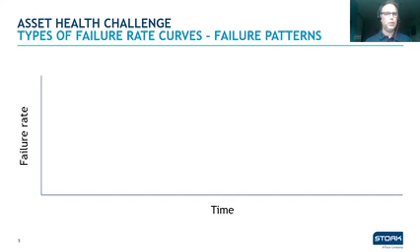First, we can have what we call infant mortality. The failure happens especially at the start of an operation, after the equipment was installed or commissioned, or after a repair.

The other one, quite opposite, is that you have a relatively low amount of failures, and by the lifetime of the equipment you see some kind of wear out, and at the end of the wear out zone, at the end of the lifetime, you have more probability of failure.

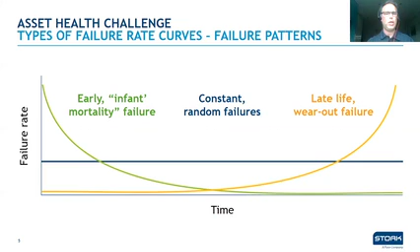The third option is random failures. Failures that happen over the lifetime of the equipment. They happen, sometimes we don't know why. It could be that we operate outside of the operating window, that the quality of the raw material has changed, that we have process inputs that have changed, or that we have maybe changing weather conditions. The failures happen, and in some cases we just don't know why.

Before I continue with my presentation, I would like to invite the audience today to participate in a poll. Please get ready to select one option out of the six on the screen. What do you think? What is the most dominant failure pattern?

Is it A, wear out, meaning slowly increasing probability of failure, and at the end of the lifetime you see more probability of failure in the wear out zone? Is it B, infant mortality in the beginning, slowly increasing probability of failure, and again at the end of the lifetime in the wear out zone, increasing probability of failure? Or is it C, fatigue, slowly increasing probability of failure towards the end, but we cannot notice one clear wear out zone at the end? Or is it option D, infant mortality, high probability of failure, and then constantly a probability of failure towards the end of the life?

Or do you think it's pattern E? Once the equipment is newly installed or has been repaired in the workshop, you see less probability of failure, less failures appearing. But then in the initial break-in period, you see a slowly progressing pattern of failures. Or is it

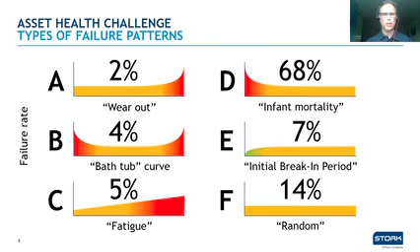The other conclusion is that only 11% of failures are age-related, and 89% of failures are non-age related. So the vast majority of failure patterns could be subject to condition-based maintenance. One of the key characteristics of condition-based maintenance is that it improves the accuracy of the probability of failure. In short, condition-based maintenance helps you better predict when a maintenance intervention is needed. It reduces unplanned downtime of your plant, and also reduces unnecessary tasks that you'd otherwise do with just time-based preventive maintenance.

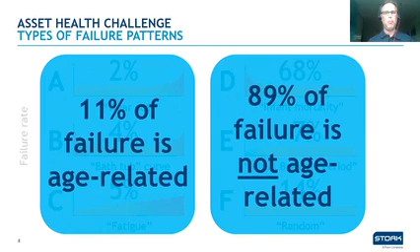In this period of the COVID-19 pandemic, better scheduling of maintenance interventions might also lead to fewer people on site, which is an additional benefit of condition-based maintenance. What are the three flavors? Within condition-based maintenance, we see predominantly periodic inspection, continuous condition monitoring, and predictive maintenance, or as we call it, APM 4.0, with reference to the Industry 4.0 era we are currently in.

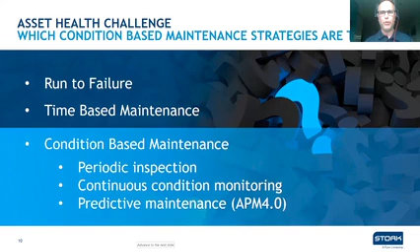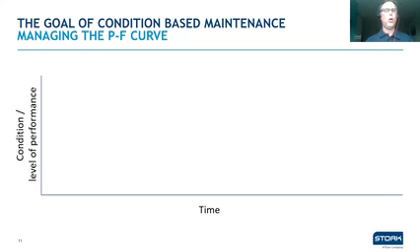Before I go into more detail about these different techniques, I want to take a closer look at potential failures. A potential failure is a condition that we can identify, which indicates that a functional failure is either about to occur or is in the process of occurring. For a long time, we defined a failure this way: the equipment breaks and we fix it. This was for a long time the most dominant maintenance strategy.

The graph on this slide, with the vertical axis showing condition and the horizontal axis showing time, shows the condition of an asset and how it degrades over time. We call this graph the PF curve. The time from the potential failure point P, where the equipment starts degrading, to the point where it actually fails, is what we call the PF interval. It's also called the warning period, or the lead time to a failure.

This is what we call today's current definition of a failure. In the red zone, as you can see on the screen, the degradation can really be noticed, and in that period of time, the equipment is no longer performing its function as intended. The main objective is to capture a potential failure before it actually occurs, before point F. So the key challenge is: how can we move left on the PF curve and have more lead time to properly schedule a maintenance intervention before point F, or maybe even before point P.

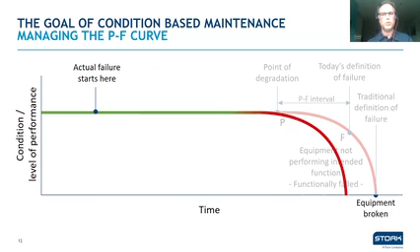Now, if we detect it over here, we are pretty late in the ball game. There is a very short lead time to schedule a maintenance intervention? To give us more comfort, we need to find ways to create extra lead time, based on certain criteria. It's very complex equipment, it's highly critical, and we need more time to plan properly a maintenance intervention, or order spare parts which are very capital intensive. We need a longer lead time.

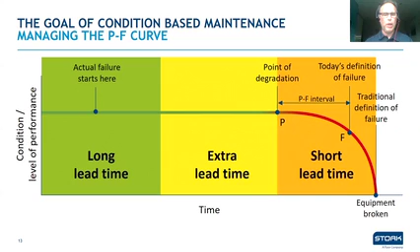Now, as I promised, let's take a look at the different techniques. We have periodic inspections as the first one. Here we enter quite late in the interval. The main characteristic is that it's usually executed by people on site who walk down the plant and do a visual inspection, use their human senses, use an infrared camera to do an inspection, take an oil sample to do an oil analysis.

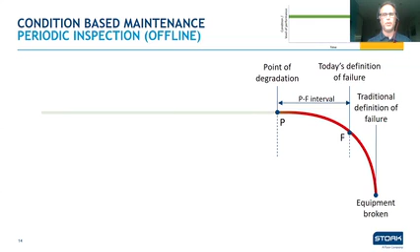Key elements of this, of course, is that we try to have an inspection interval which is shorter than the PF interval. For instance, what we have seen in practice, if your PF interval is 8 months, start maybe with an inspection interval of 1 month. Then you're on the safe side, but at least you know that maybe you can extend it to 2 months.

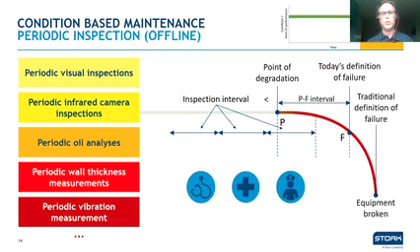The advantage is it's rather low cost. People are already on site. It's very precise, it's very flexible. But the downside is that it's rather late in the process, and it depends largely on the experience of the observer and the state of mind of the observer.

If you want to create more lead time, let's take a look at the second option, which is condition monitoring. It's designed to detect failure effects such as changes in vibration, in pressure, in temperature. It uses technological observation methods to collect data regarding the actual condition and health of the equipment at this moment in time.

When a certain parameter goes beyond an acceptable level, a maintenance job is scheduled and executed. Actually, at that moment, your asset is really telling you that it needs maintenance. Together with our customers, we find the right sensors to capture the failure data. We install it, we need to define the ways to transmit this data. We store the data, we define the thresholds, the bandwidth in which the parameters should operate, and we monitor the equipment. This can be 24/7.

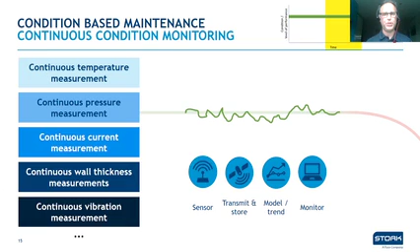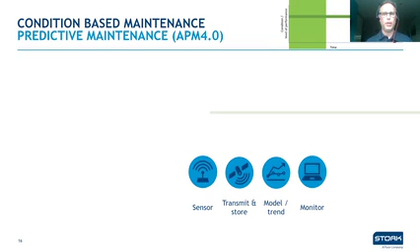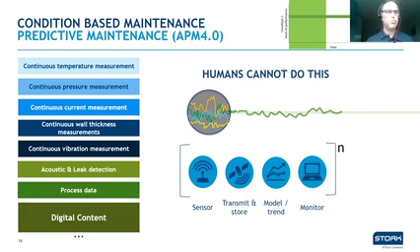For some reasons, as I mentioned before, we need to detect the failure much earlier in the PF curve. We need, in this case, more data from different data sources, as this large volume of data should be analyzed to predict more accurately when the failure will occur and when the maintenance intervention should be scheduled. This large volume of data cannot be handled by humans. We also look at data that resides in images, in other devices, in text, because maybe that data resides in digital content.

Let's make this a little bit more practical. We have a pump where we installed sensors, but this pump operates in a very complex environment, it's part of a complex process. We had some issues with that pump, which caused unplanned downtime. Therefore, we took the decision to use as much data from different data sources as possible to make a better prediction of when we have to do maintenance on that pump.

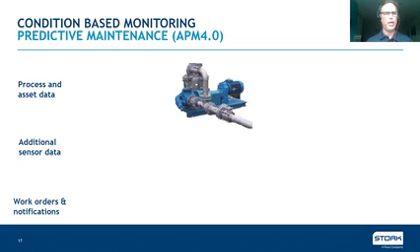We look at process data, we look at sensor data, we look at work orders data, data that resides in work orders. Based on the existing data, we label the patterns in that data as good or as bad patterns. So we say, in this pattern, the equipment is behaving as normal, and in another pattern, the behavior of that equipment is abnormal. After labeling the patterns, good or bad, we select the right algorithm and develop a model that describes the pattern.

Of course, this model is not ready to be implemented. We need subject matter experts, which we have within Stork, spread around the world, to use their expertise to train the model and to increase the level of confidence of that model, and to be able to define more accurately when the failure will occur.

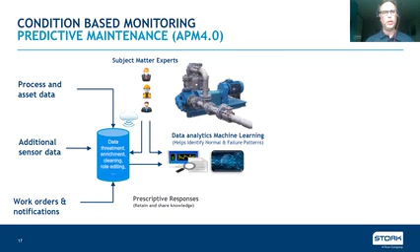Using data analytics tools and machine learning, we can identify normal and failure patterns. We can even go a step further by using prescriptive responses, not only to define when the maintenance intervention will have to be scheduled, but also which action we should take.

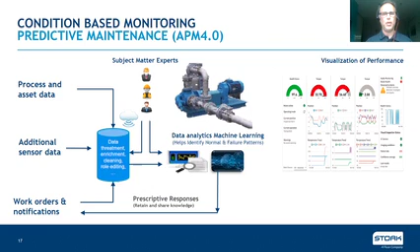We use dashboards not only for condition monitoring to see the current health and condition of the assets, but also to predict when the maintenance intervention is needed.

What is the best stepped approach to define the best condition-based maintenance strategy for your company? Obviously, we determine based on criticality analysis which assets we are going to focus on.

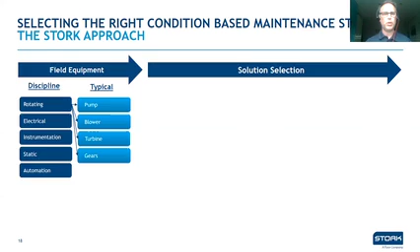We define the different disciplines and per discipline the type. For instance, we have disciplines like rotating, electrical, instrumentation equipment, and in rotating you have a gearbox, a pump, or a turbine. Based on our experience within Stork, we want to select with you the right solution, and we do that based on a questionnaire.

The first question we ask is what problem you are going to solve. What is the business case behind it? What asset objectives do you want to achieve? Because condition monitoring and predictive maintenance are quite costly to implement, so there should be a clear ROI, return on investment, and a clear understanding of the problem you're trying to solve. Then secondly, we look at the quality and availability of your data.

And thirdly, we look at the complexity of the equipment and what external influence factors we have on that equipment. The outcome of that questionnaire is what is the best monitoring solution for your equipment.

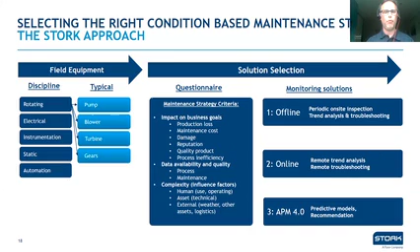So to summarize, before I show some slides on references and use cases: define your objectives, look at the operating context, which industry you are in, and look at the equipment type—is it a pump, a turbine, or static equipment?

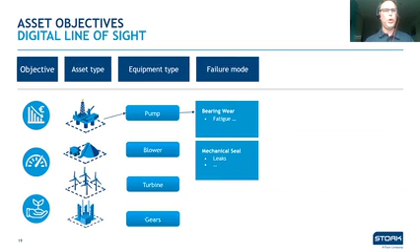In which ways can it fail? What are the failure modes? What strategy do you want to apply, and which health indicators will we use—which sensors, temperature, pressure, leaks—but also which digital content we need to analyze and use for information purposes.

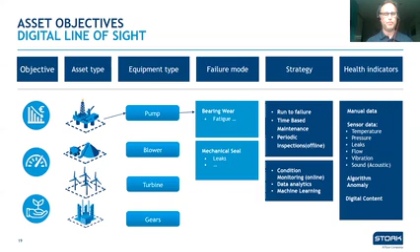Currently we are implementing these monitoring solutions across many industries and customers. We see that within our customers, we implement all three strategies—not just one—alongside run to failure and time-based preventive maintenance. By doing that, our customers now consider Stork a proactive service provider.

We also see with digital transformation, which we are assisting our customers with in looking at our maintenance service contracts, that we are more considered now as a proactive service provider, using data and our experience to help our customers improve their asset performance.

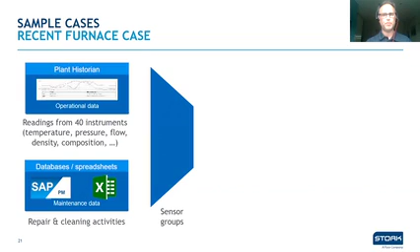One customer challenged us with the furnaces we maintain. They said, prove that it works. We looked at the different data sources, the maintenance history of our people which resides in different systems, and we grouped the sensors. Afterward, we looked at the failure patterns—what good looks like and what bad looks like. We developed the algorithms and trained the model based on the experience of our people on site.

The outcome was that we could prove to the customer that we could postpone 3 cleaning activities per year, avoid 2 days of shutdowns per year per furnace, and reduce the maintenance costs by 3 million.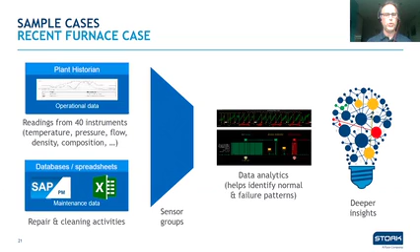And there we see that the collaboration with the customer changes from client-supplier towards more of a partnership. So if you do it well, there's a clear value to achieve.

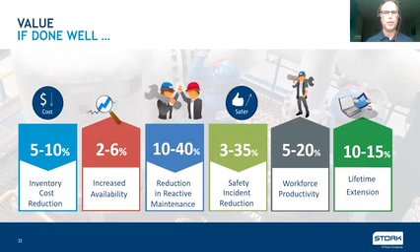Your workforce will be more productive and work more safely, and especially in this COVID time, it's important to have fewer people on site. By reducing unplanned downtime, you increase availability. By better preparing your work, you see a reduction in spare parts inventory. But last but not least, you can also extend the lifetime of your equipment.

As you have heard in the last minutes, all strategies have their place as long as you take a stepped approach to define the right strategy—whether it's run to failure, time-based maintenance, or condition-based maintenance. They all have their place.